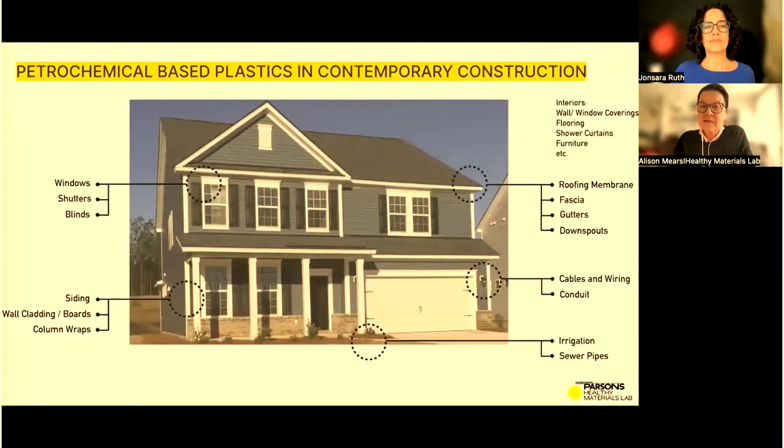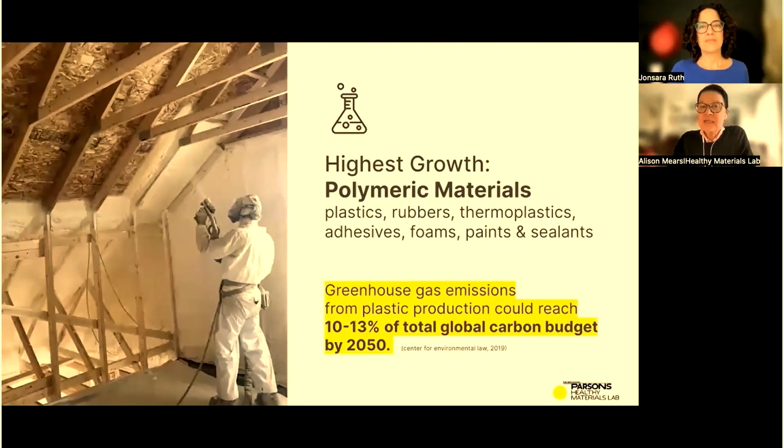The petroleum-based products in common buildings today contain a vast array of untested, often toxic chemicals that consume and emit carbon. The polymeric materials like plastics, rubbers, thermoplastics, adhesives, foams, paints, and sealants show the highest growth rate in construction materials and in consumer products. These materials contribute greenhouse gas emissions during their production and are toxic in use.

We assume that the materials we buy have been tested for safety, but most chemicals commonly used in building and consumer products in the United States are not regulated for their impact on human health or the environment. Only 250 of the more than 86,000 chemicals currently in use are tested, and only 5 have been partially restricted by law. These chemicals have a profound impact on human health and the planet.

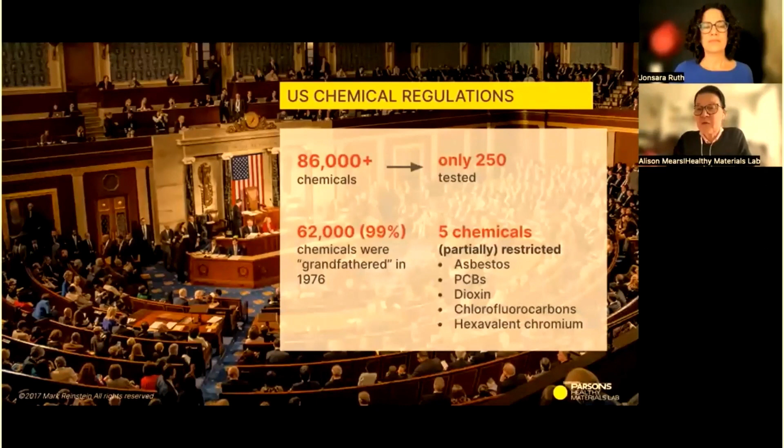Research like Mount Sinai Institute's exposomic research has revealed that the ingredients used to make the products we build are threatening our health. There's evidence that the same ingredients found in building products are now found in human blood, linked to many diseases which are increasingly impacting communities.

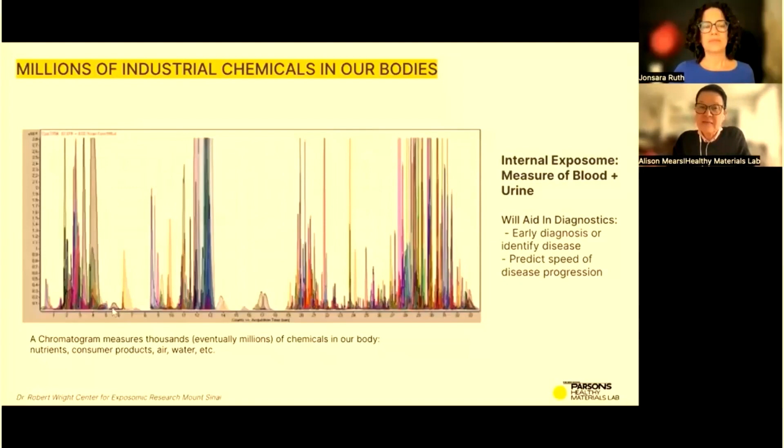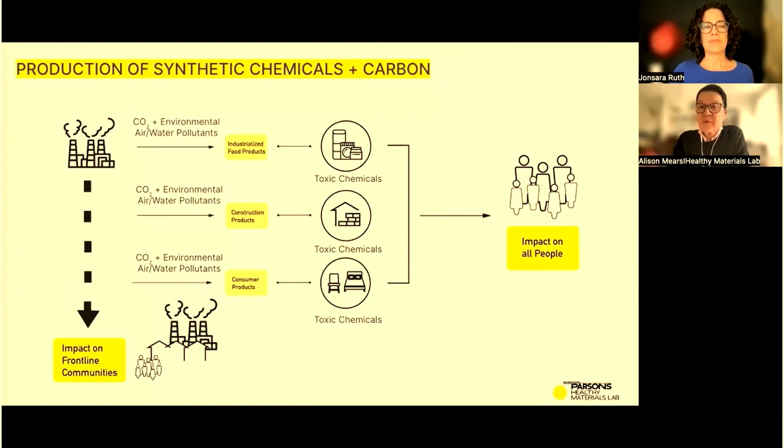We live with the toxic and carbon implications of our decisions over the last century. We're surrounded by petrochemically derived products in industrialized foods, in packaging, building products, and many consumer products. If we live in a frontline community, we're surrounded both inside our houses and in the outside environment with a range of pollutants, including both CO2 emissions and other pollutants.

So we as architects and designers are confronted by these problems, and we try to make sense of it. By understanding what's inside every material we use, we can start to eliminate toxics in the built environment that impact people's health. We call this kind of thinking material health thinking, making a habit to be curious about the composition of a material and always asking, what's it made of?

It's a new practice for designers to ask these deep material questions, which sometimes involve chemistry or health sciences, and to make these queries a habit. So we begin with that: what's it made of?

And then how is it made? Where is it made? Does it require finishes? How will it be installed? Who will be exposed? Where does it go at the end of its useful life? And who's impacted throughout the entire life cycle of the material?

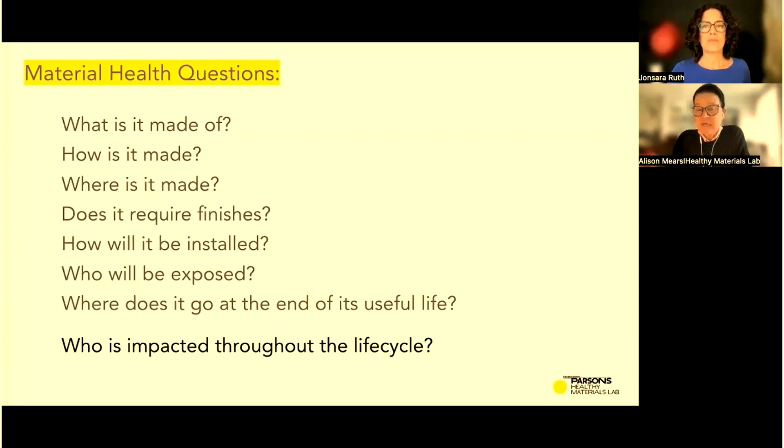This list of simple material questions are incorporated into our teaching and into our practice of design. We bring this kind of thinking as foundational to our understanding of what we do in materials research. And so we begin with simple structures like housing, because a healthy home determines many of the positive health outcomes in a person's life.

In a typical residential wall in the US, there are many layers of building products, which often contain toxics. We're eager for healthier building systems to become the norm.

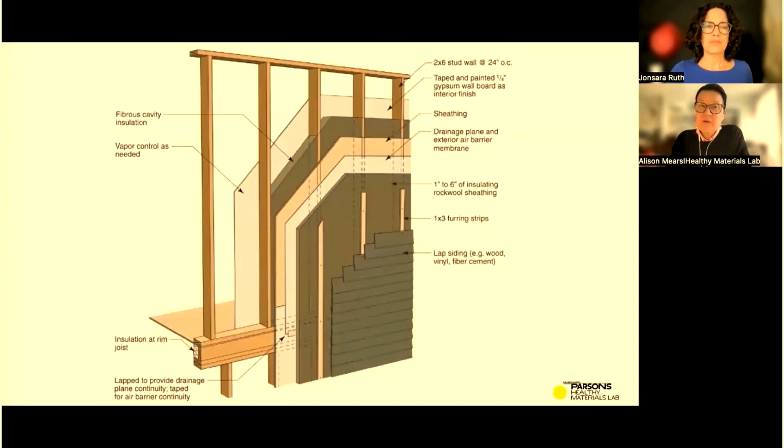We embarked into research about the history of hemp in North America, beginning around 2017. We understand that the farming of hemp did not begin in 2018, but hemp has been cultivated and used by indigenous nations long before the colonizers reached the Americas.

We also acknowledge early in American history that essential knowledge about how to work with the tough hemp plant was embodied in enslaved people. After emancipation, this knowledge was often lost.

Our research closely aligned with Laurie Daytner and Don Service's vision to create a new ecosystem of hemp for the city of New Castle, Pennsylvania. This small post-industrial city, surrounded by fertile agricultural regions, has the potential building stock and infrastructure that could be revitalized for a hemp building economy.

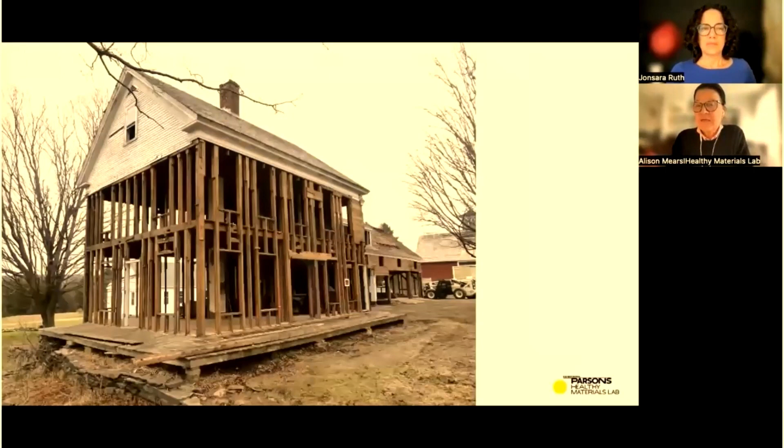Like many post-industrial cities in the US, there is a lot of vacant balloon-framed housing stock waiting for a better future. Renovating existing buildings is important because renovation has a lower carbon footprint than new construction.

When deconstruction began, it revealed that the existing materials in the house were mostly derived from petrochemicals. You see the vinyl siding, a lot of vinyl paneling, vinyl wall linings, tiles, plastic blinds, and laminate surfaces.

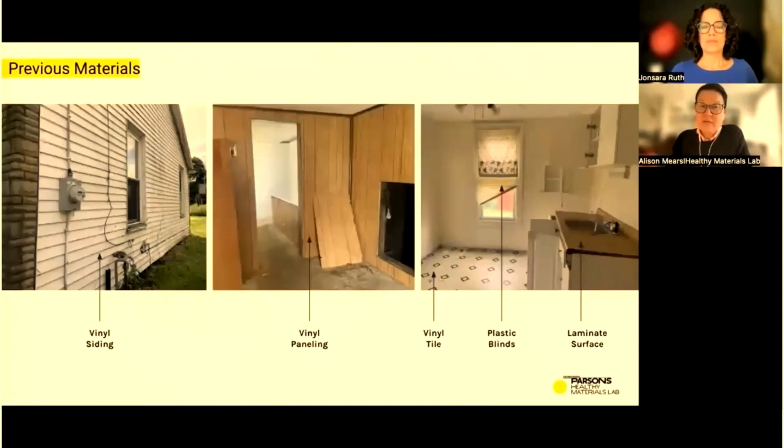When the materials were stripped away, we saw not only the natural old wood, but also evidence of fire. Some of the structural members had to be replaced. This is one of the common challenges of renovations — the things you discover as you start to take away all of the finishes.

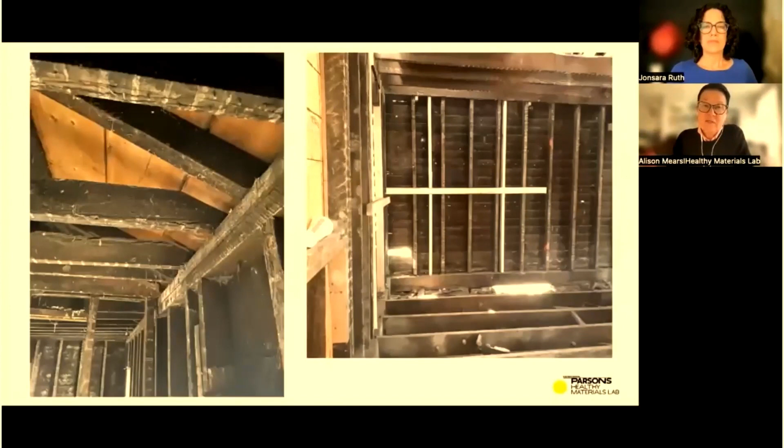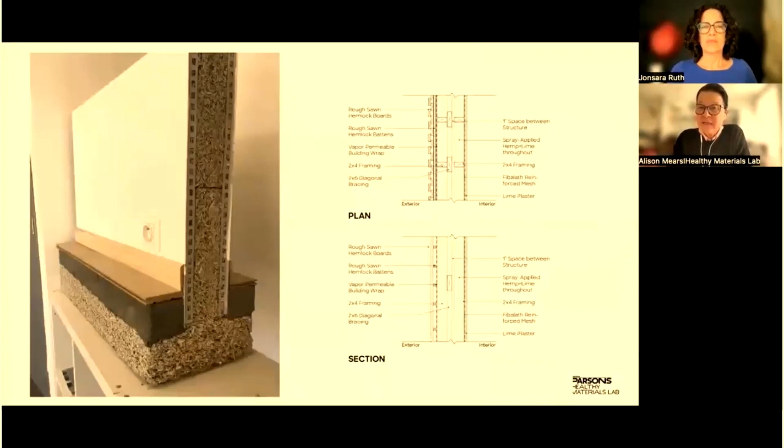In the end, we used a rain screen from locally milled hemlock instead of lime plaster on the exterior, to allow the Hemplime insulation to completely dry out.

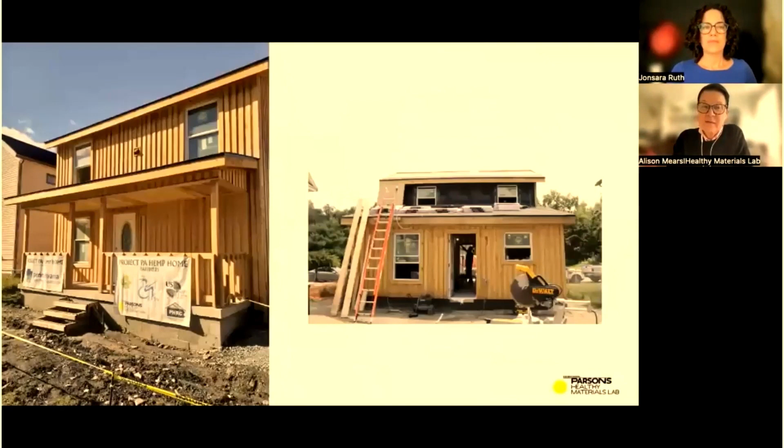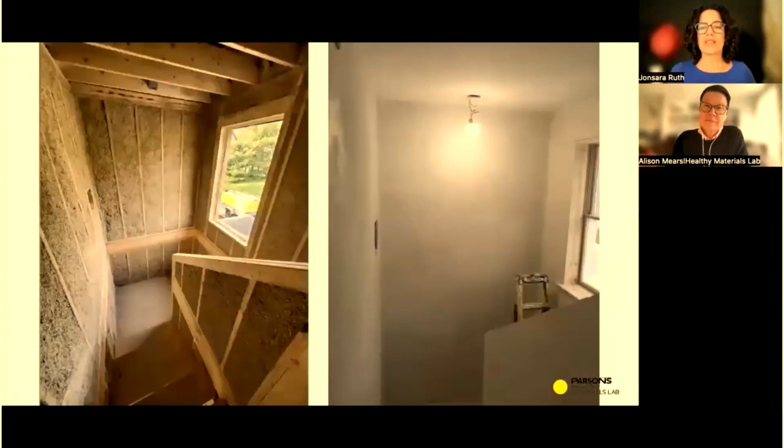The interior was finished with lime plaster, creating a breathable wall, because lime plaster also absorbs toxins and VOCs from the atmosphere. We also worked with manufacturers of healthier products who donated healthier finished materials to increasingly reduce toxic emissions indoors.

So we used hemp flooring that was actually made from the hemp grown in Newcastle, and Laurie may have told you about that.

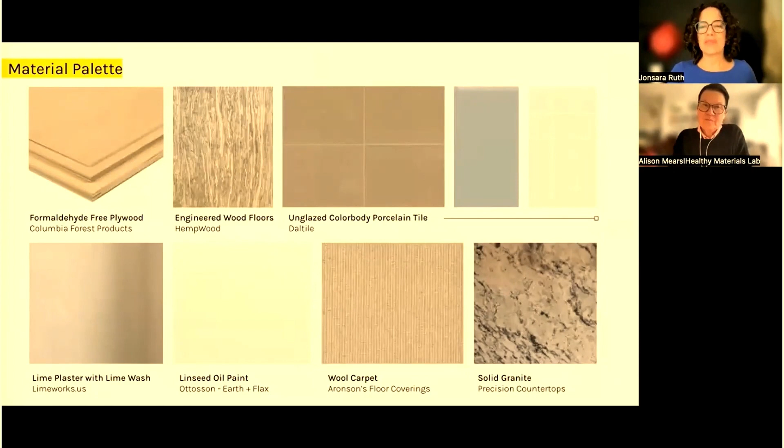Lime plaster wash on the walls, and solid granite unfinished countertops to avoid PFAS chemicals that are typically in surface treatments.

We also used PureBond formaldehyde-free plywood in the kitchen cabinets and simple furniture and fittings. This furniture was all second life. And then simple ceramic tile, which also does not have any VOC emissions.

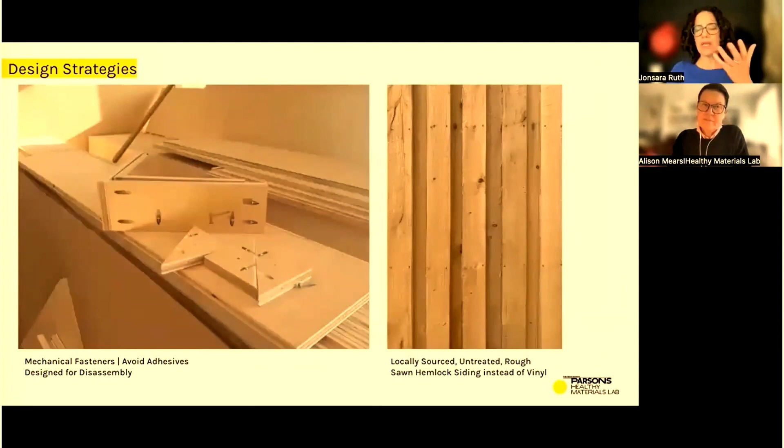We also designed mechanical fasteners instead of glue to reduce the use of adhesives, which then reduces toxins even further in the interior environment.

So there are many takeaways from this project, and we put together a booklet about it and lessons learned, which is available for free on our website — we'll give you the link later.

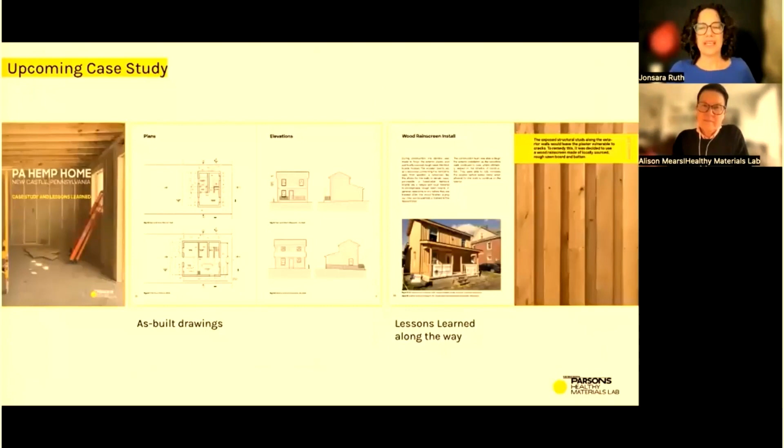After opening, we worked with industrial hygienists nearby in Pittsburgh to conduct indoor air environmental quality testing so that we could gain data about this improvement.

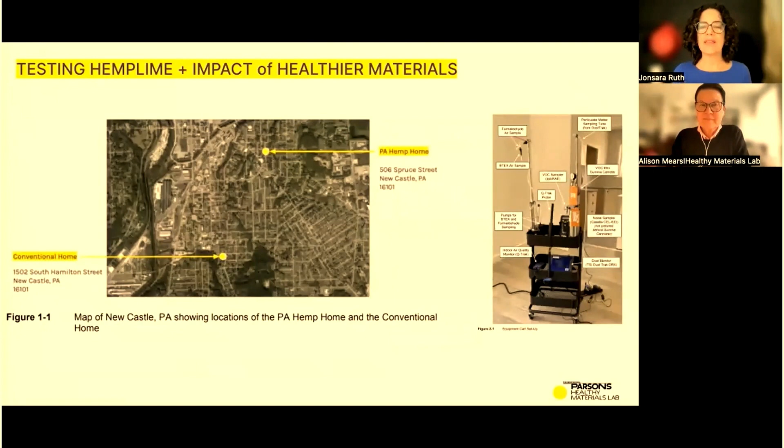We came up together with a long list of possible toxicants whose levels we wanted to measure. We did this experiment by comparing the PA Hemp Home, which was newly finished, to a similar sized control house nearby that was made entirely of conventional building materials, including vinyls and plastics.

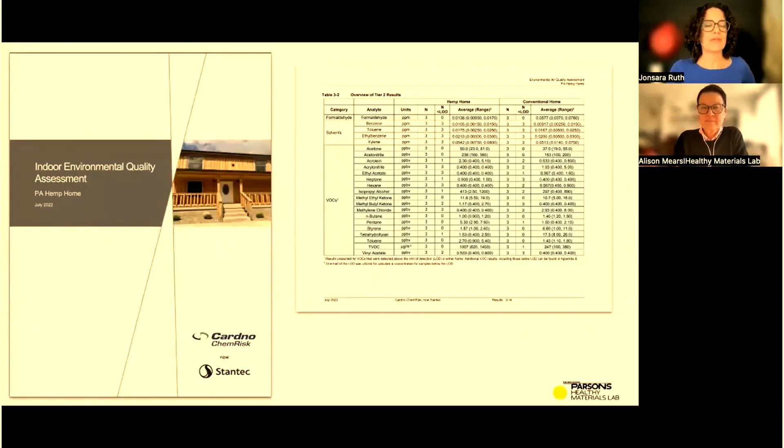They then produced a report for us, a very thorough environmental quality assessment. The most significant finding was really interesting: they identified a 400% reduction in formaldehyde in the interior air, which is significant.

Looking back at the start of the design and construction process, there wasn't any guidance in local building code for hemp-lime construction. So this slowed the filing process. It was a long process to make this building.

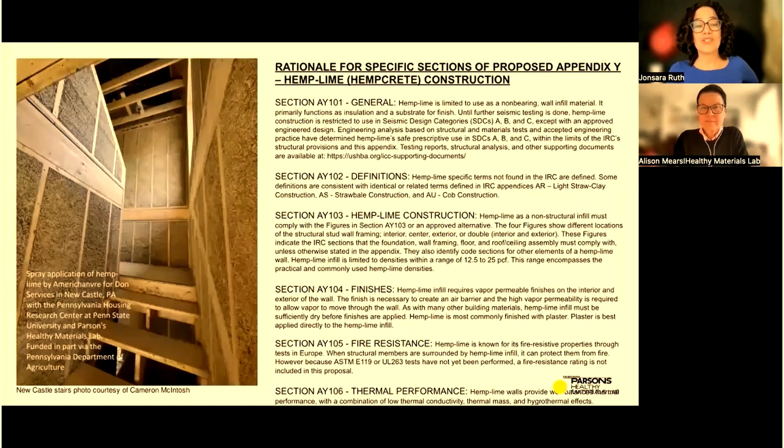The PA hemp home was used, though, as an example and supporting documentation for the proposed 2024 Hemp-Lime Construction Appendix for the International Residential Code. And this is super exciting. I think what's really important to note is that there is a great spirit of collaboration in the U.S. Hemp Building Association and all the associates.

And because of their continued support, this kind of movement is happening to have hemp lime be accepted into the building code in the United States.

Also, just this week, we heard from the U.S. Hemp Building Association that in addition to hemp lime being accepted into the IRC, they're also creating a model spec to be used in commercial buildings beginning in 2024. You can find this on USHBA.org. There's a lot of great technical data there that you could use if you plan to use hemp lime in a construction project.

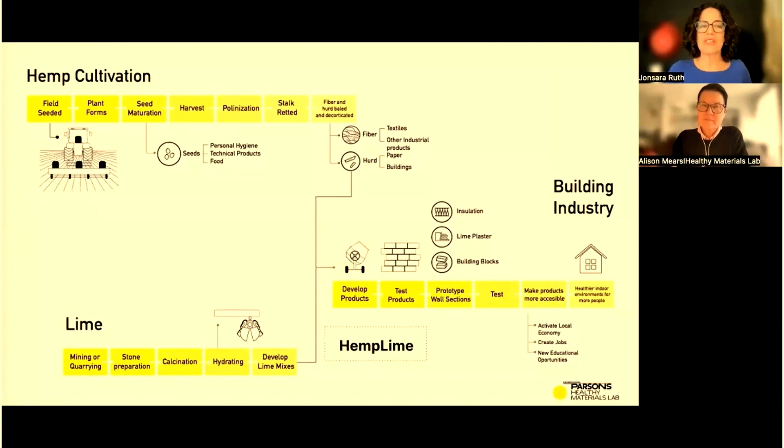At Healthy Materials Lab, we mapped the system that would be needed to create a viable hemp lime building industry in the United States. This diagram speaks to the complexity of launching an agriculturally plant and mineral-based materials ecosystem that creates new materials and new ingredients for buildings.

Fast forward to 2022: although there are farms planting hemp across the United States, hemp cultivation has actually declined while the industry waits for guidance from the federal government on the regulation and use of hemp products. Total hemp acreage is small, just slightly larger than the area used to grow Christmas trees. So while there's huge value from hemp-derived CBD products, the demand and value of hemp hurd is still quite low. And we're looking to change that.

In contrast, there is countrywide access to limestone and processing to create lime products. So that's a positive.

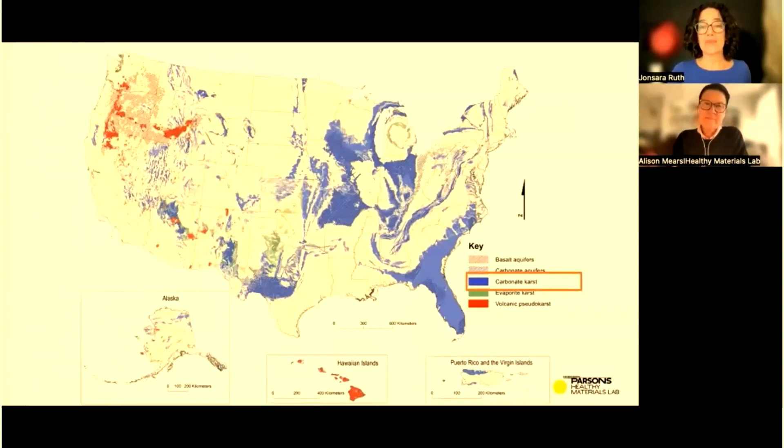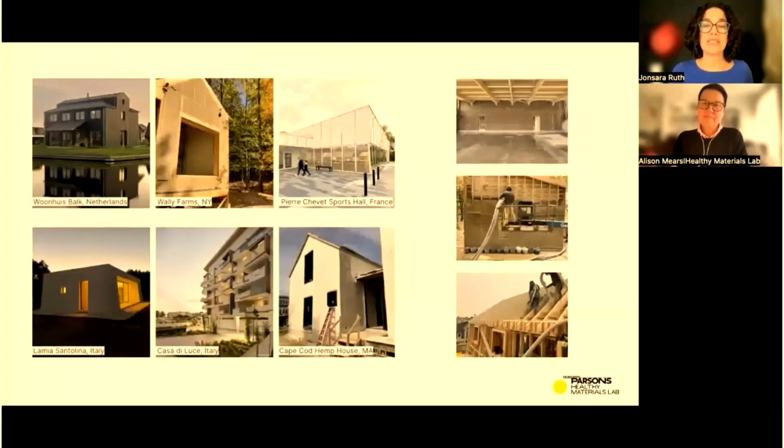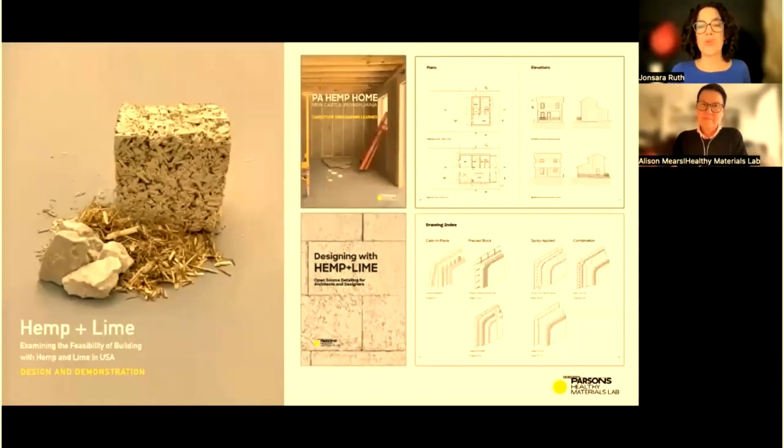After completing the PA hemp home and looking at the analysis of that whole process, that led us to contact a handful of other architects and builders who very generously agreed to allow their experiences and construction details to be published. Our initial research, as well as these case studies and wall section details, are in small publications, downloadable for free from our website, to be used as a resource for open source detailing for other architects and designers.

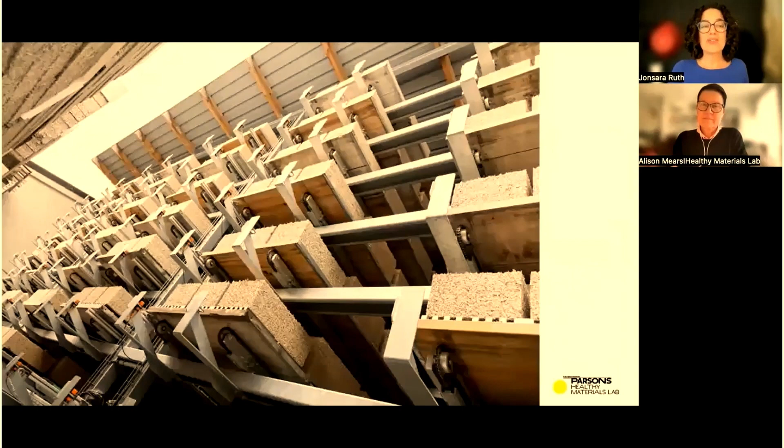The next step we know is that facilities around the US may open up, just like they have in Europe, with mass-produced hemp-lime building products that are precast. We imagine this will create new jobs and a whole new industry.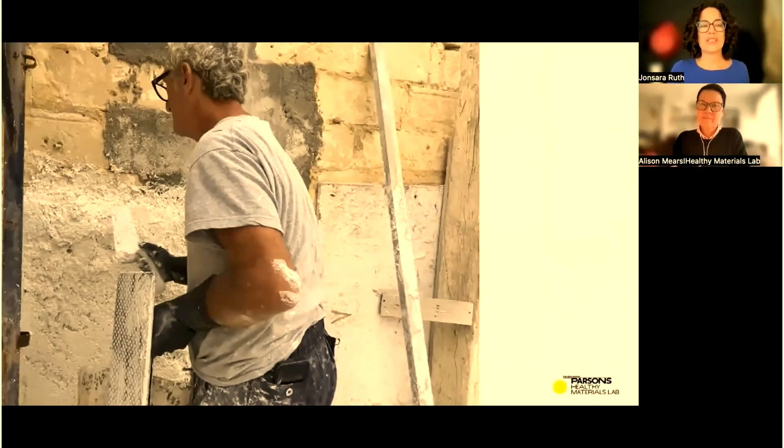In the US, there's potential for workforce development in the masonry trades, which are on the decline, but with the use of hemp-lime products, the masonry trades and plastering could increase. This needs our attention. We already know that the International Masonry Institute is keenly interested in these opportunities.

We're living in critical stages of fundamental design and cultural transformation, driven by this new paradigm of regenerative materials and energy to meet the ethical and moral obligations of reversing global climate change. We need to reverse the course of recent history to begin to live with and for the planet and all people by reducing carbon emissions, removing pollutants linked to those emissions, and restoring habitats destroyed by industrial production and rampant urbanism. Building homes can be central to this change.

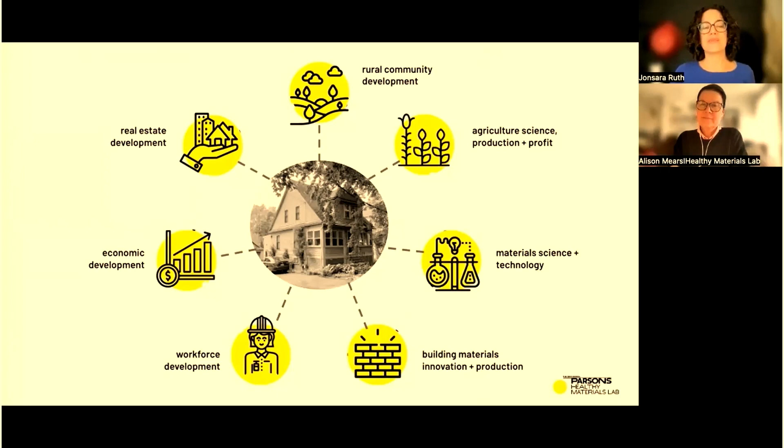Through the building of healthy, affordable housing, we know that we can address the toxics, carbon, equity, and loss of biodiversity issues. And as we improve materials for buildings and building systems, we encourage economic development, workforce development, profitable agricultural systems, new materials and product development, and healthier lives.

This work requires the deep thought and wisdom of all of us, but together and collaboratively, we can positively change the world and the way that we build. We're committed to creating a more integrated, equitable, and delightful place for everybody to live.

We look forward to hearing from you over the next days and how your work is at the forefront of this change.

And we need to make this ubiquitous material, the hemp lime, a ubiquitous material in North America. And we know that Pennsylvania can lead the way. Thank you. Thank you.